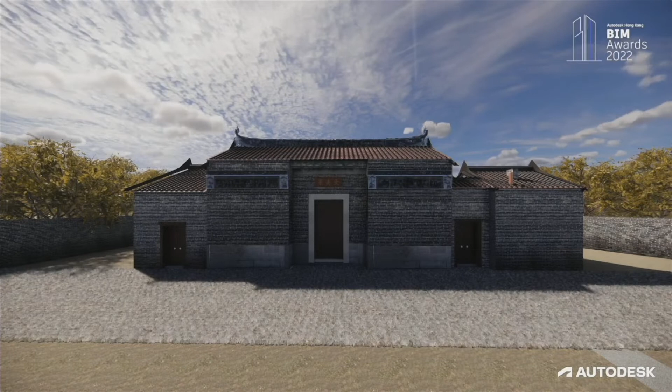Tai Fu Tai Mansion is the first government-owned Chinese-style monument testifying the use of Heritage Building Information Modeling (HBIM) on heritage conservation in Hong Kong. It is one of the pilot projects for building up the as-built BIM inventory for the Architectural Services Department. This monument is a 2-story grey brick mansion with delicate design and rich embellishment, built around 1865.

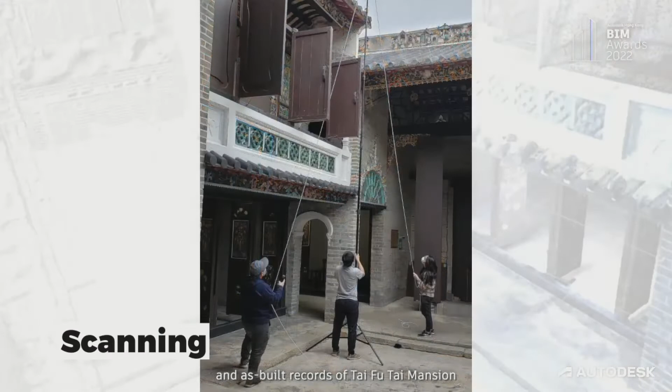There are quite a lot of challenging BIM applications in this project. First, we do not have much design information and as-built record of Tai Fu Tai Mansion, which is quite common for old buildings, so we conducted extensive historical research and interviews with academics, officers of the Antiquities and Monuments Office, local villagers, and retrieved our own records to find out the chronological development of the site. Next, we had to identify and assess the architectural merit, historical interest, and variety of the elements, and conduct 3D scanning on-field to collect existing condition data such as building structure, dimensions, and images in order to build up the HBIM models.

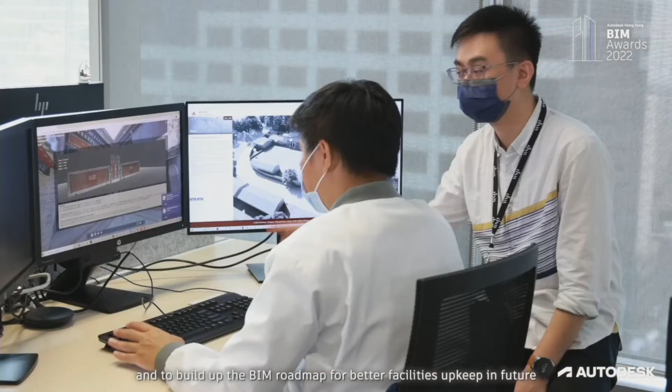Common data environment Autodesk BIM 360 is used in this project by the following parties on different BIM uses. First, maintenance surveyors of ArchSD, as one of the maintenance agents of government-owned buildings, are responsible to coordinate with all team members and build up the BIM roadmap for better facilities upkeep in future. Second, heritage conservation consultants, Revival, carried out historical research study on the background of Tai Fu Tai Mansion, determining the character-defining elements and their level of significance. Third, BIM consultant WSP developed the HBIM model for animations, virtual tour, and heritage archival records by incorporating character-defining element schedules and photographic records of each element into the model.

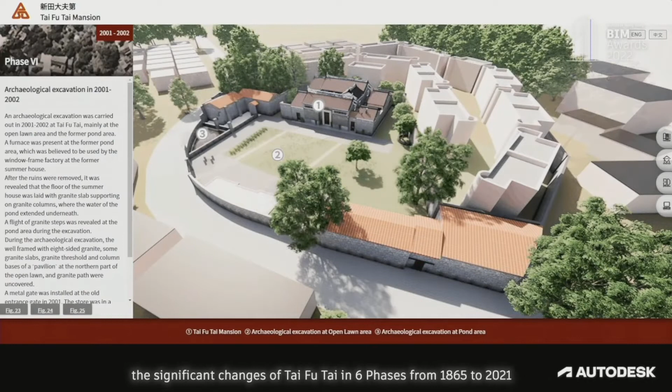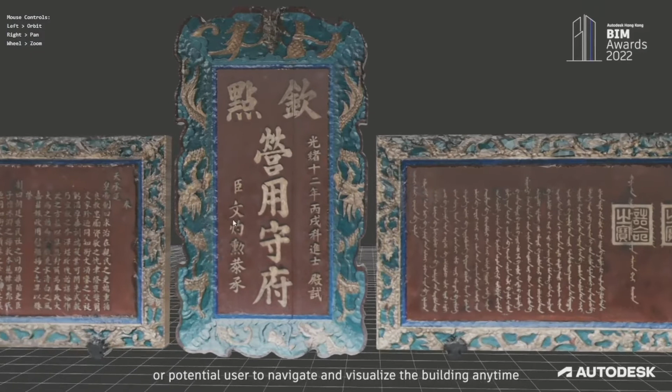To showcase these changes, a timeline storyboard was developed with illustrative images recording the significant changes of Tai Fu Tai Mansion in 6 phases from 1865 to 2021. A virtual tour is also produced by adoption of game engine technology and seamless 360-degree spherical panoramic images. Key plans, information text with historical information, and interactive 3D objects are provided to enable the project team or potential users to navigate and visualize the building anytime, even if the site is closed or far away from town.

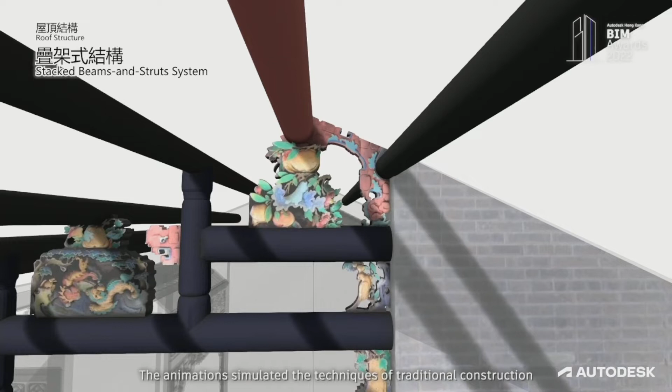Last but not least is the production of 4D animations. The animations simulated the techniques of traditional construction to enable maintenance personnel to visualize the construction sequence, for example the laying of the Chinese-style pitched roof structure, decorative plaster molding, and bricklaying. This is particularly useful as training material for appreciation of historic buildings.

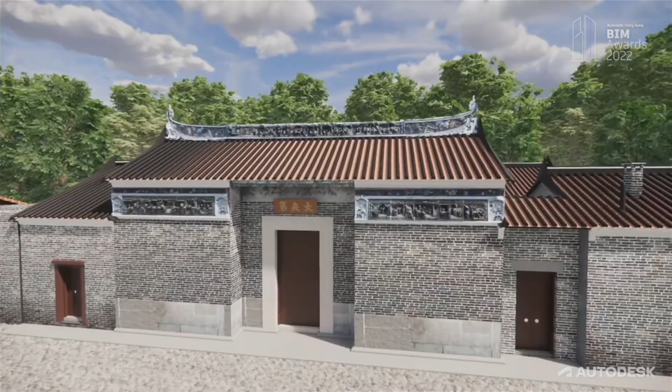Wow, what an impressive project indeed. So now we'd like to invite Ms. Chong and Wendy to be on stage to present the trophies for us. Meanwhile, please allow me to invite the representatives of Architectural Services Department, Hong Kong SAR, to be on stage and receive the award.

Congratulations! Perfect. Okay, let's take a photo together.

Congratulations, and we would like to invite the representative to deliver the acceptance speech for us.

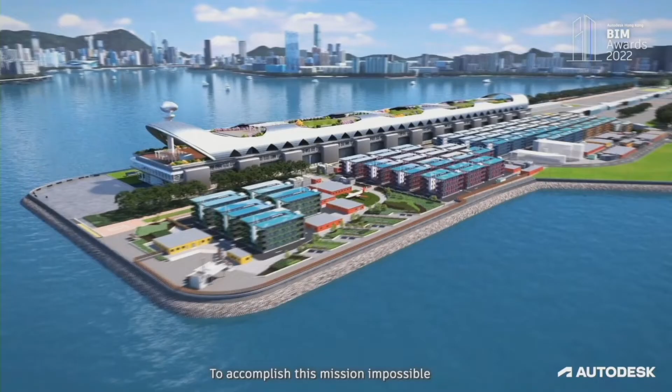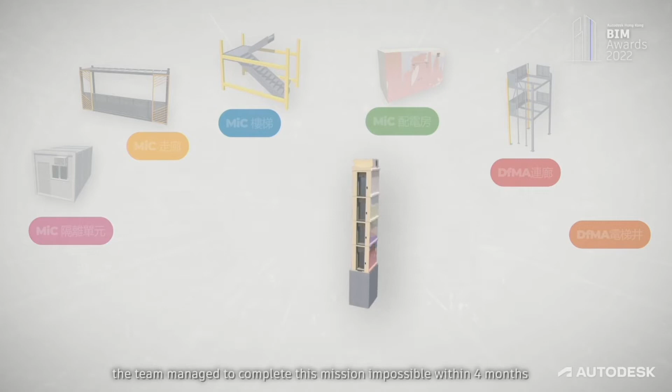To accomplish this mission impossible, the team utilized building information modeling and related innovative technologies throughout the whole project lifecycle. Based on the DFMA design method, the team broke the prefabrication record for a single permanent building in Hong Kong by using MIC rooms and stairs, DFMA corridors, and the first mixed structure DFMA lift shaft in Hong Kong. With the help of innovative technology, the team managed to complete this mission impossible within 4 months and deliver the project in best quality as well.

This project is very similar to the Hong Kong Infection Control Center in Lantau back in 2020 — same background, same building nature, and also the same challenges. Again, the most challenging part of BIM application is time. We have an even tighter schedule and higher MIC adoption rate. Luckily, we have the same project team, and everyone is already familiar with BIM application.

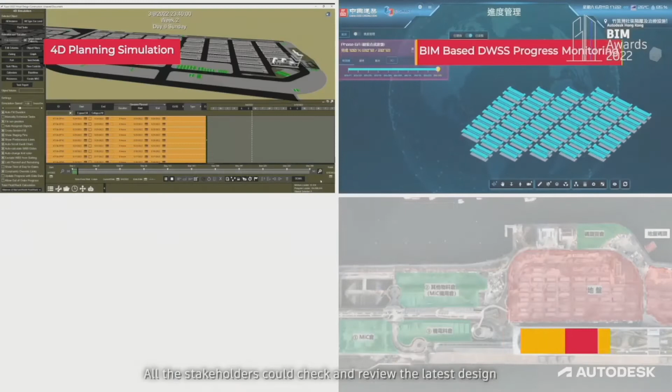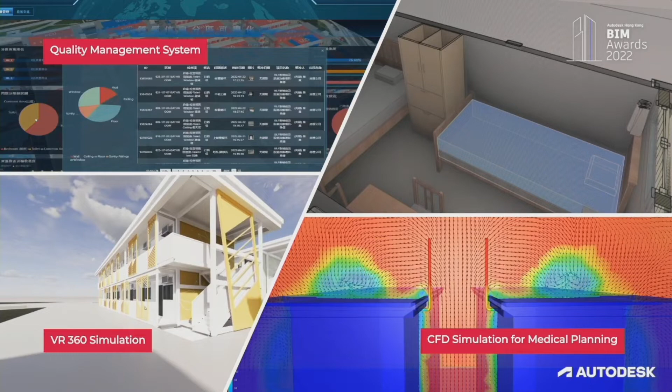We use BIM-generated animation to train the new staff. All the stakeholders could check and review the latest design through the online cloud platform in real time. The key to successful BIM implementation is ISO 19650. We set up a proper information flow, common data environment, and clear roles and responsibilities, so all the BIM uses are done properly.

We use Autodesk BIM 360 together with the C-Smart platform created by CSHK as the CDE. The team members create, coordinate, review, comment, and revise the design BIM model on the CDE, along with the information contained at each project stage. One thing that could be improved about CDE application in our next project is incorporating the facility management requirements and information management system into the CDE, which would save more coordination time in the FM stage. CFD simulation was carried out for airflow patterns in the roof area during the medical planning stage.

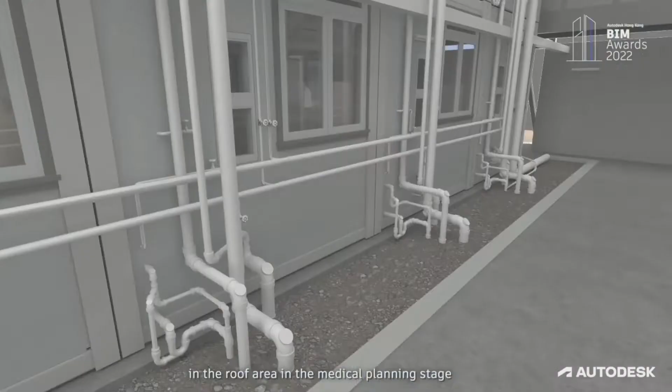According to the results under extreme conditions, such as wind speed of 220 km per hour, the height of the windpipe was raised to more than 3 meters, so that the polluted air can be directly discharged into the high-velocity area, complying with infection control standards and requirements of the World Health Organization and Hong Kong local standards.

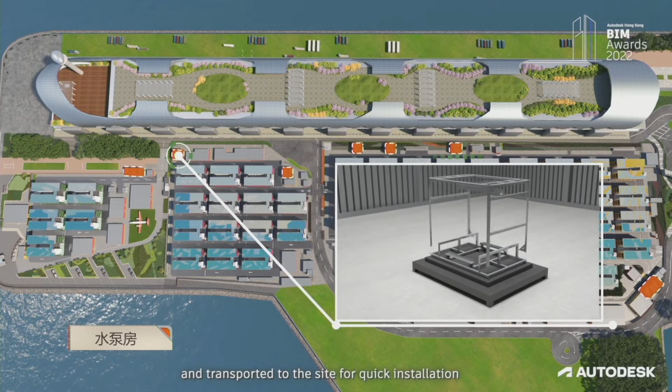In addition to the modular building, the team used the DFMA method to design the supporting facilities as well. For instance, the DFMA water pump is assembled at the factory and transported to the site for quick installation. All pumps are equipped with a LoRaWAN wireless signal transmission system. By this IoT technology, the transmission distance can be up to 10 kilometers and the operation of pumps can be monitored at the central control room in real time.

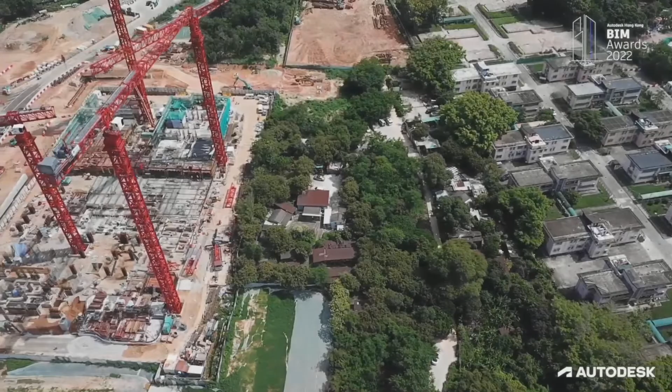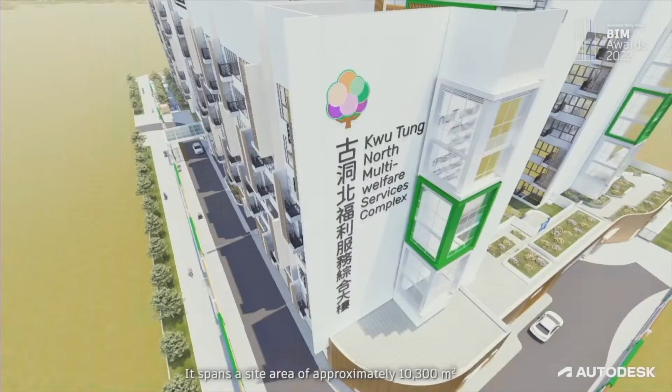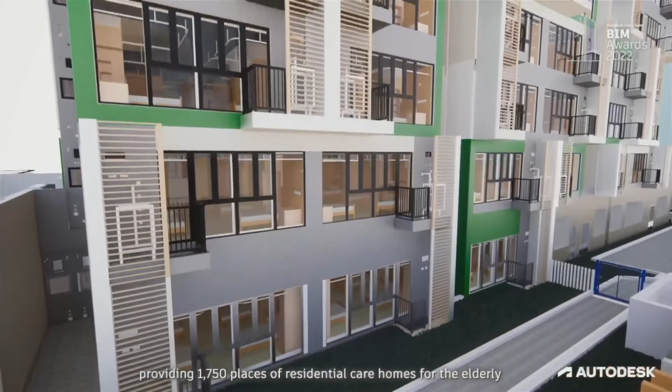The multi-welfare service complex is located at Area 29 of Kwu Tung North New Development Area. It spans a site area of approximately 10,300 square meters and a total gross floor area of approximately 44,000 square meters. Managed by ArchSD, the project was commissioned to Shui On Joint Venture for the design and construction of the complex in December 2019. The project consisted of two buildings providing 1,750 places of residential care homes for the elderly, care and attention homes for the disabled, and a day activity center cum hostel for the mentally disabled. The multi-welfare service complex will provide accommodation for the eligible elderly residents currently living in the Dills Corner Garden in the vicinity.

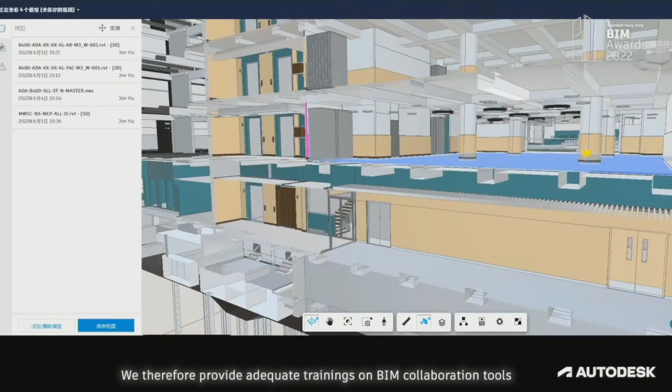At the start of the project, the team faced some challenges through BIM application. We tried to encourage different project stakeholders to get involved in BIM collaboration throughout the design and construction process. However, not all related parties possessed the same level of BIM maturity. We therefore provided adequate training on BIM collaboration tools.

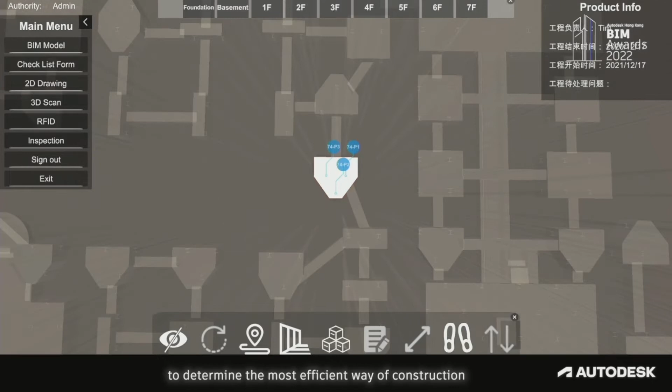On the other hand, modular integrated construction technology is fully applied in this project. During the construction stage, a total of 1,764 MIC modules were planned to be installed. Therefore, having a streamlined site process of the MIC cycle is the most critical issue to be resolved. To tackle this, we took advantage of 4D animations supported by lab-based work to determine the most efficient way of construction, covering logistics, work sequence, and safety provision.

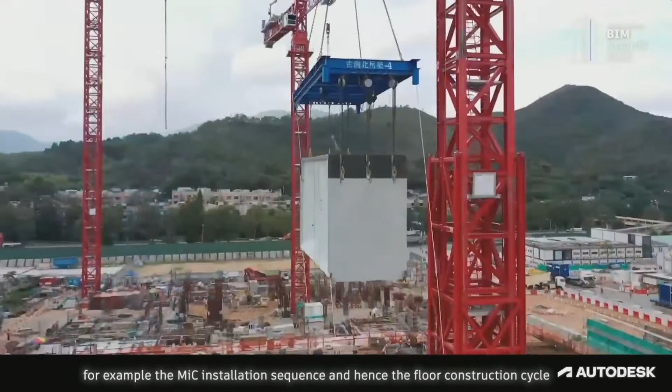It is inevitable to have thousands of clashes in the development of the design. The number of clashes found by Navisworks and CDE which were resolved during the design stage is the KPI for design quality and avoidance of abortive work. The project team has verified the sequence of construction activities by BIM 4D modeling before execution on site, for example, the MIC installation sequence and hence the floor construction cycle. To this end, the floor cycle was successfully achieved.

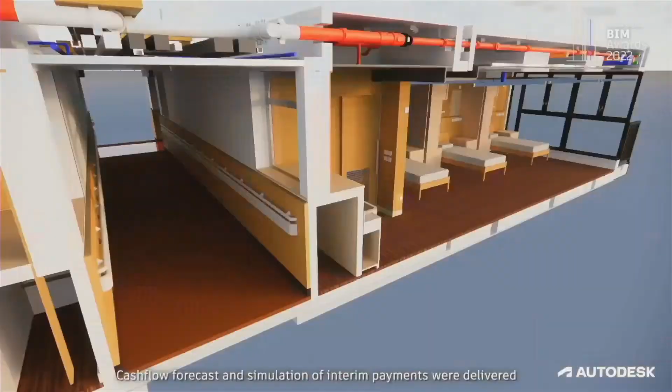Moreover, the BIM 5D modeling demonstrated the successful integration of the BIM 3D model with master program and cost data. Cash flow forecasts and simulation of interim payments were delivered. Collaboration with quantity surveyors was sought in this regard, which aimed to provide an accurate financial model.

The outbreak of COVID-19 has made a dramatic change to the world of work. Social disruptions such as suspension of face-to-face meetings, work from home arrangements, etc. Setting up of CDE and introduction of open BIM collaboration tools have enabled a better coordination workflow over the new normal. To echo Construction 2.0, we must transform to smart construction through the adoption of innovative technologies.

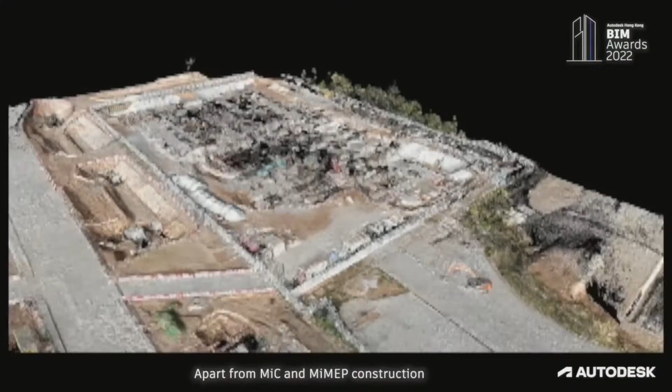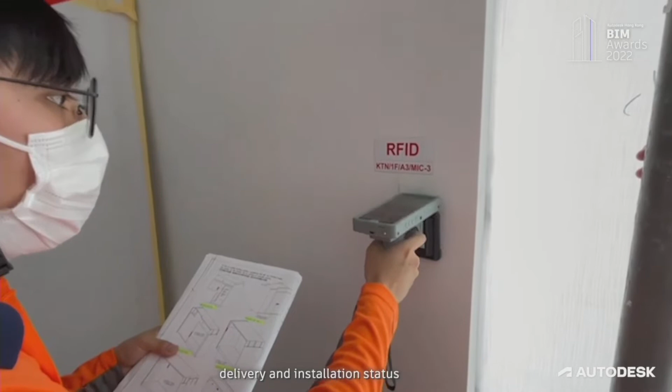Apart from MIC and MiMEP construction, digital twin platforms with the aid of drones, point cloud scanners, and virtual reality to enhance safety, etc. It could also be passed to facility management together with the as-built BIM model. Integration of BIM and our RFID system was done by means of Autodesk Forge to provide a real-time graphic output of MIC production, delivery, and installation status.

Good things come in pairs. This project is also winning the Autodesk AEC Excellence Award 2022 for Best Building Design Project Award, with over 500 submissions from 47 countries. We couldn't be prouder.

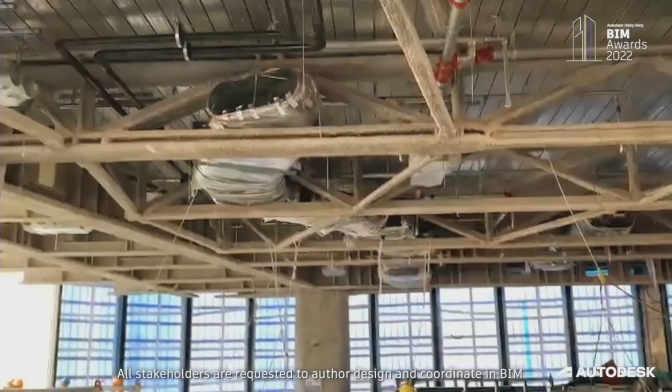Given the complexity of the design, RLP has led the project team to overcome a number of challenges. The project team of this world-class project involves over 25 key stakeholders who come from different countries including mainland China, the UK, Germany and Czech. All stakeholders are requested to author, design and coordinate in BIM, and the team has to overcome cultural differences and technical software incompatibility.

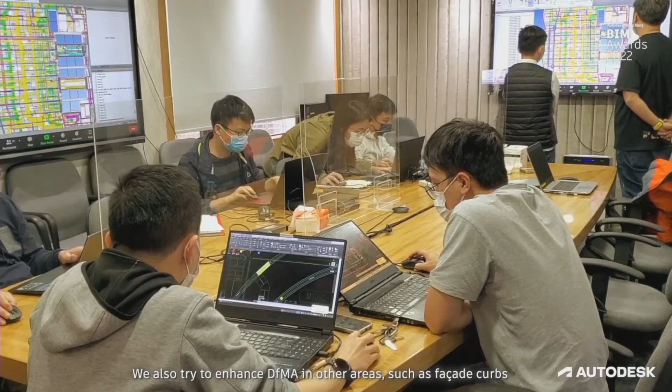This iconic design leads to massive prefabrication of steelworks and curtain wall panels of high level of precision. The facade elements have curvilinear geometries which we cannot afford to correct any design errors on site. Because of this, it is necessary to have full planning for DFMA. Being a main contractor, Hip Hing keeps close bonding with our clients and consultants, and leads our subcontractors to fully adopt BIM in daily coordination. We also try to enhance DFMA in other areas such as facade curbs. It helps frontline workers to enjoy higher flexibility of facade installation and eliminates 30% of time from handling remedial works.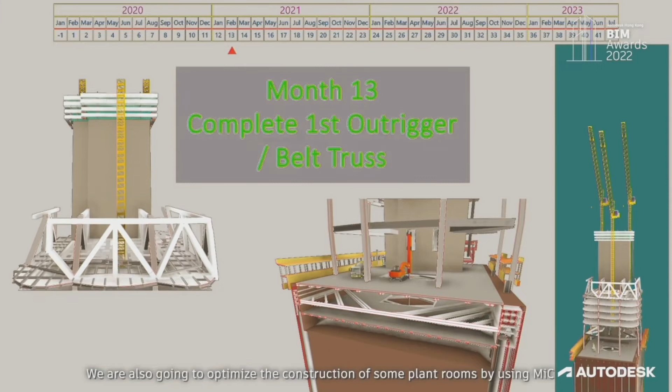We are also going to optimize the construction of some plant rooms by using MIC. Compared to traditional cast-in-place construction, the new approach is supposed to save 16% of time in critical path. These key performance indicators demonstrate that after collective contributions, all parties can eventually share the bonus gained from BIM.

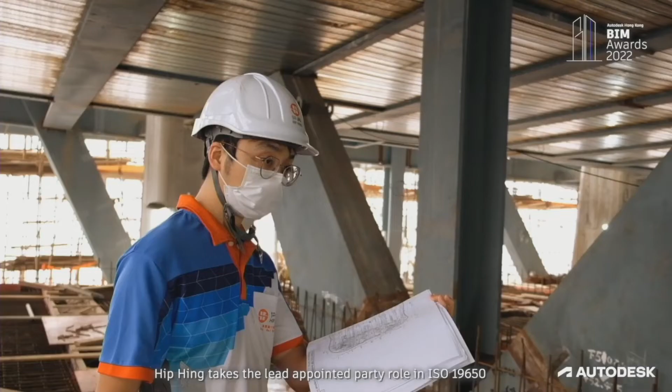In the construction stage, Hip Hing takes the lead appointed party role in ISO 19650. We set up a standardized folder directory in the cloud to collect, manage, and disseminate the information for all project team members. Through creating this single source of information, it facilitates the teams using up-to-date information at any moment. However, for these complex projects with detailed geometry, we also need a powerful platform to fetch the information from the CDE. And like other projects, we also come across internet constraints.

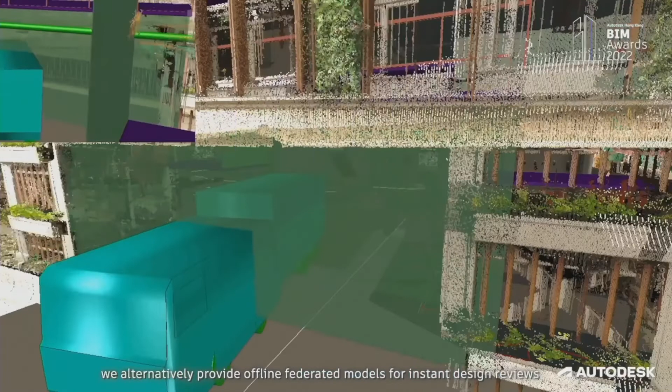Therefore, we alternatively provide offline federated models for instant design reviews. Autodesk Navisworks offers the best solution in this situation because it is compatible with open BIM model formats, and it also supports third-party collaboration tools so that we can channel the issues into our CDE.

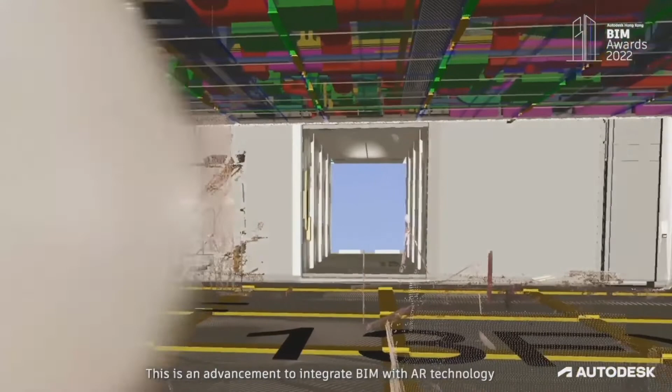We always educate our staff to build up an automation mindset. For instance, we have compiled different programs through the Dynamo plugin. We replace tedious and repetitive works. We even encourage our staff workers to use their mobile device to overlay the design model with site background. This is an advancement to integrate BIM with AR technology. It also helps to create an accurate digital twin towards the operation stage.

To invite again Ms. Xiong and Wendy to be on stage to present the awards for us. Meanwhile, let's invite the representatives of Hip Hing Construction Company Limited and Henderson Land Development Company Limited to be on stage to receive the awards, please. Congratulations.

You may stay a little bit closer as it's a big team.

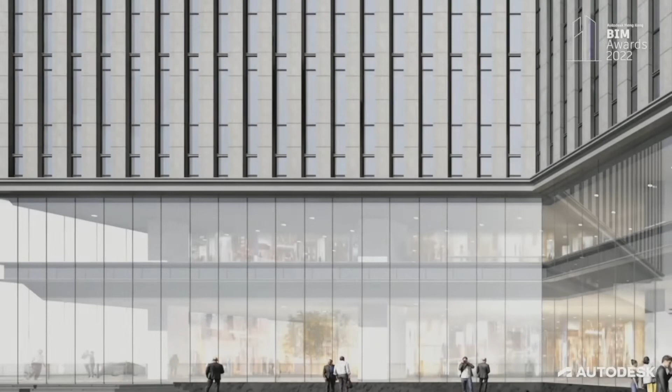The Kai Tak district is becoming a distinguished, vibrant, attractive, and people-oriented community by Victoria Harbour. The proposed commercial development consists of two separate parcels under the same lot. A pair of tower buildings emerged as an iconic gateway overlooking Kai Tak City Centre and City Square at the front, introducing a new experience to the public with aesthetic and spatial quality delivered.

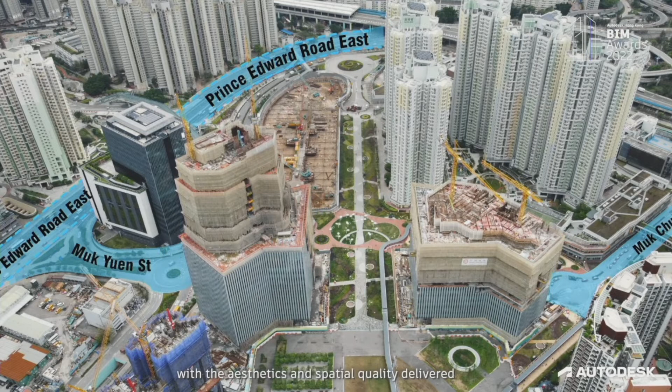Upon completion, the Twin Towers will host a new Sogo department store along with complementary retailing, entertainment, dining, and lifestyle servicing facilities. The retail complex is expected to be in business by the end of 2023 and is set to become a new landmark in East Kowloon.

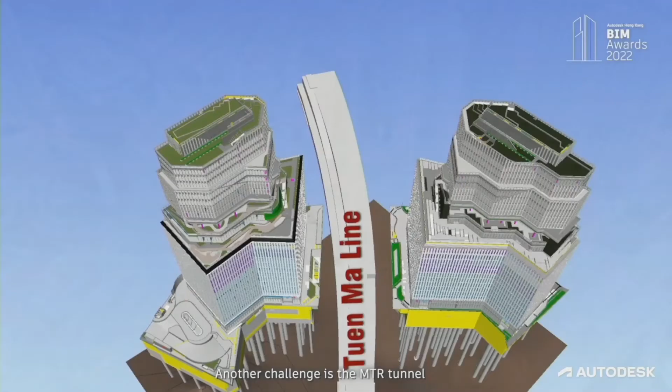This project includes two towers with distinguished layouts, and due to the drainage reserve zone crossing our site, a mega truss system weighted more than 1,000 tons was designed to handle the weight of 9 stories of structure beneath it. Another challenge is the MTR tunnel that runs between the twin towers of our project. To maintain the stability of the structure near the MTR tunnel, the project team decided to maintain all shoring systems during basement construction, even though the change would sacrifice the construction period.

Our project team utilized 3D laser scanning to evaluate the existing condition of ERS and BIM models, which deepened our understanding of existing conditions. Our engineers can acquire more accurate measurement of potential conflicts and optimize construction planning adaptive to site constraints. Such optimization to construction planning extends to the installation of the complex mega truss system. BIM models offer a realistic environment to examine our construction sequence, site utility planning, and safety measures.

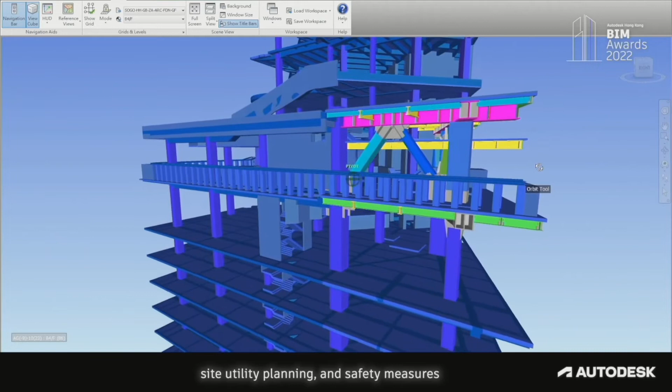MIC and MiMEP are another key innovative feature in this project. The MIC and MiMEP modules are well coordinated in the BIM model before fabrication. More than 1,000 parts of the modules were fabricated in the factory, thus reducing site work and accelerating construction progress. We realized several major achievements during the construction period.

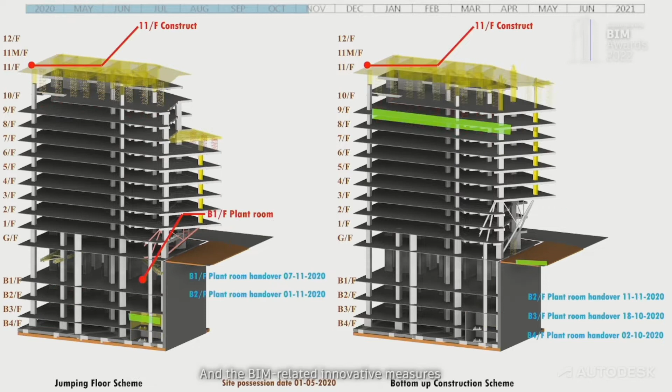More than 1,500 design issues were resolved before construction. The BIM-related innovative measures are set to contribute a 4-month acceleration to the program, saving a significant amount of resources for communication and paperwork. They also mitigated project risk due to site constraints and complex construction activities.

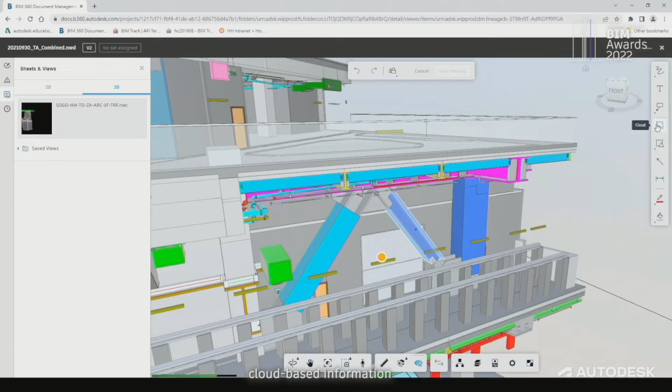The pandemic has brought a significant impact to all industries and has changed our working habits. BIM 360 as the common data environment allows all project stakeholders to access the same secure, cloud-based information, allowing them to collaborate on BIM models, drawings, and documents remotely. The functions of tracing records, status, and versioning help us maintain a single source of truth in a centralized location.

Now we'd like to invite Ms. Chong and Wendy again to be on stage to present the awards for us. And let's invite the representatives of Hip Hing Construction Company Limited, Leader Bright Limited, ATAL Engineering Group, and Vercon Limited to be on stage to receive the award. Congratulations!

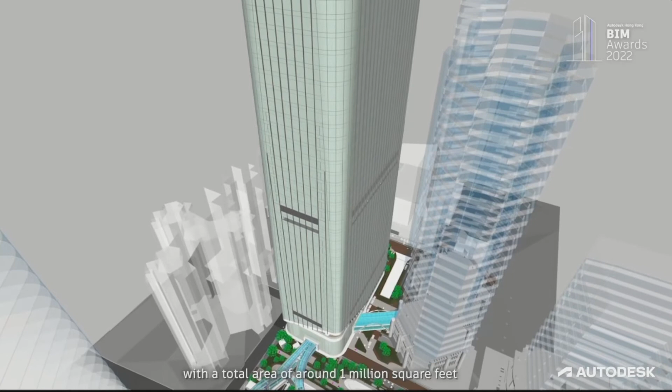Swire Properties Taikoo Place has been developed with the long-term ambition to become one of the world's global business districts. Taikoo Place is the latest addition to the district's redevelopment project. The new tower will feature 42 stories of triple Grade A office space with a total area of around 1 million square feet. It is linked to the other 8 office towers, shops, and facilities, and nearby MTR stations in the district by an architecturally designed elevated walkway.

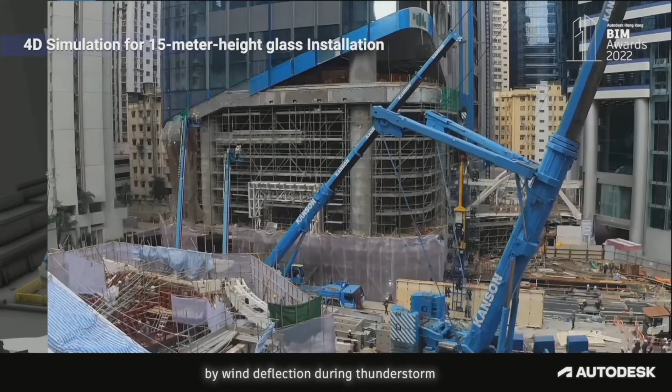One of the major challenges was the use of jumbo glass panels that span up to 15 meters tall and 3 meters wide, pushing engineering limits. The size of the glass panels would have been significantly affected by wind deflection during thunderstorms. Hence, a pre-tension system with tension rods, the first in Asia, was adopted to strengthen and guide the glass module without exposing any supporting frame or glass fins behind.

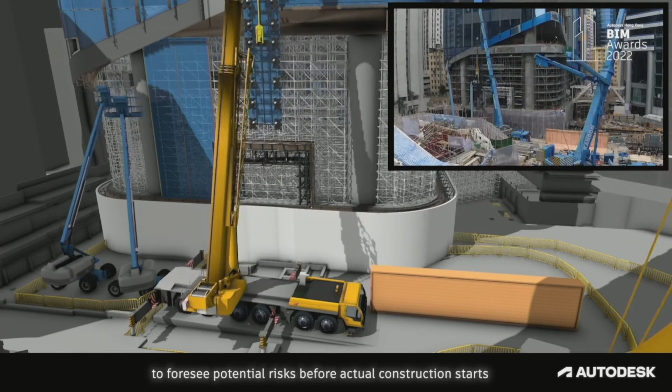Virtual design construction helped the project team conduct 4D construction sequence and method simulation for planning installation arrangements. The workflow of jumbo glass wall installation was visualized for the project team to review easily and closely the proposed procedure, to foresee potential risks before actual construction started. BIM provides a digital environment with high accuracy conditions to optimize design and shorten construction period, including complex ELS demonstrations, steelwork connection joint optimization, and digital models for fabrication.

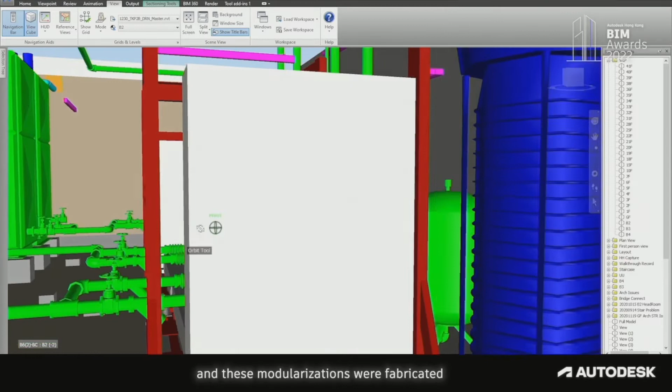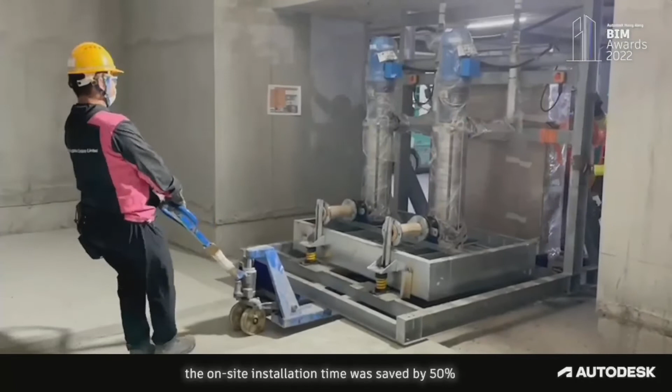MIMEP is one of the digital fabrication methods adopted in various building services systems, and these modularizations were fabricated before delivery to the construction site area. The aim was to reduce installation time on site and material wastage. Fabrication modules were designed and coordinated in BIM before fabrication commenced in the factory, particularly for the cooling tower plant modular set and booster pump set. On-site installation time was saved by 50% compared to the conventional approach.

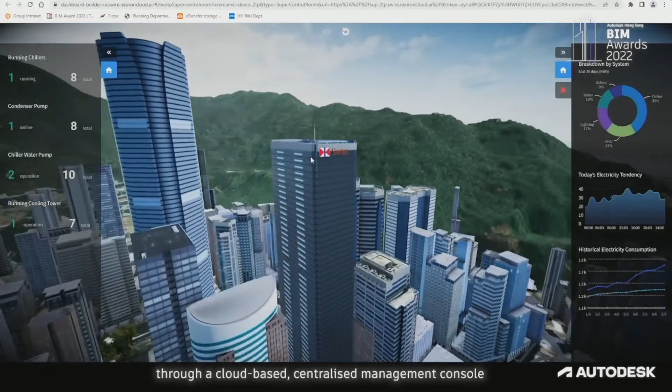Two innovative items were adopted in the two Taikoo Place projects. The first is a digital cloud and AI building management system that uses 5G and Internet of Things to gather real-time sensor data from equipment and systems. It integrates our as-built information model to display complex datasets through a cloud-based, centralized management console. It also helps automate the building system and optimize the resources of facility management. The adoption of this digital cloud AI platform has benefited the future asset management of this project.

The second innovative item was the use of mixed reality to provide a combination of real-world and digital twins, allowing stakeholders to review the virtual copy of what they were planning to create. The facility management team will benefit from identifying asset equipment locations through the platform for asset maintenance in the future.

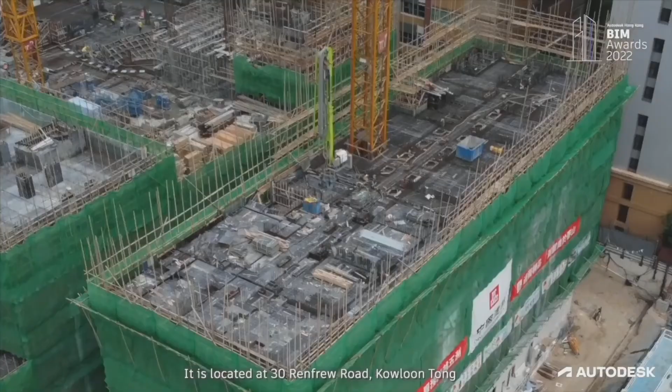The scope of works includes construction of a 4-block hostel and academic building complex with 1 story of basement, interior fitting out, exterior elevation, escalators, lifts, building services and underground utilities, and also a link bridge connecting to an existing building.

The 4 blocks are of different heights, including one with 17 stories, 2 with 15 stories, and the rest with 13 stories. The upper part of the building complex is hostel, providing over 1,700 accommodation places for wardens, tutors, hostel manager, and staff.

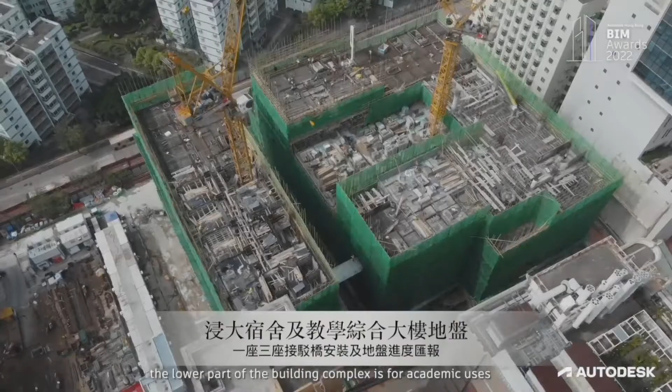The lower part of the building complex is for academic uses, with a floor area of 6,900 square meters, and facilities including a large soundtrack recording studio and a multi-purpose room with special functions.

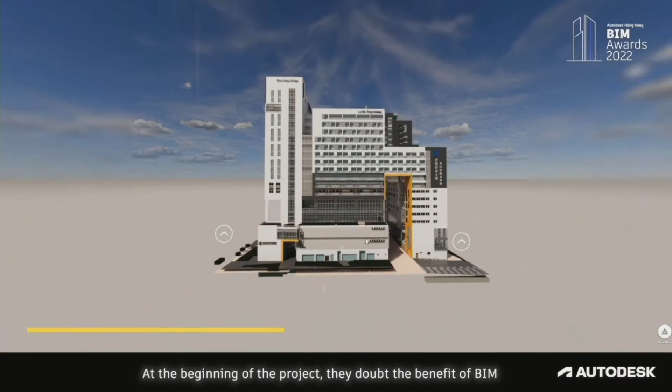The biggest challenge of BIM in this project is the lack of BIM awareness among engineers. At the beginning of the project, they doubted the benefit of BIM and thought that BIM was just a matter for the BIM team. So we adopted two strategies.

First is the policy, second is the technology. Our company established the '全民皆BIM' policy, and all staff were given proper BIM training.

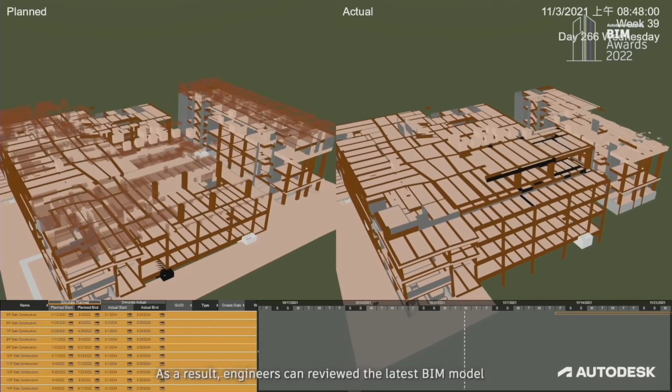Secondly, we made use of the BIM 360 platform to lower the barrier for project team members to view BIM models so they could use it. As a result, engineers can review the latest BIM model and become familiar with the non-typical structures.

Quantity surveyors can make use of the BIM model for quantity takeoff to speed up the payment process to subcontractors. Through clash detection and resolution, potential conflicts among different trades can be detected before installation. Building service engineers of each trade use BIM to review spatial information and resolve issues.

To fulfill the low noise criteria level for special function rooms in this project, an extra layer of sound insulation was added to the BIM model for detailed coordination of building surfaces.

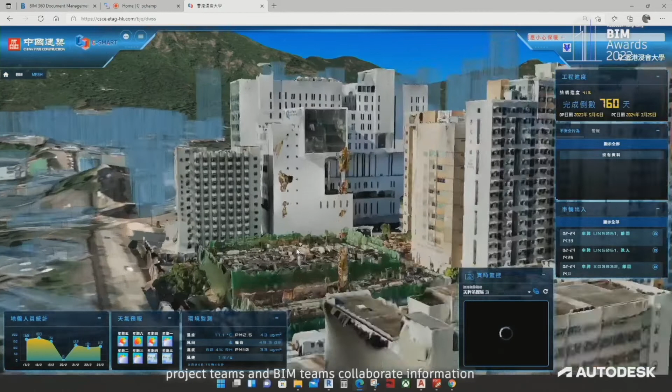Autodesk Construction Cloud and the Sigma platform, developed by CSHK, are the common data environments we used in the project. The appointing party, lead appointed parties, project teams and BIM teams collaborate on information, with information containers complying with ISO 19650. We also adopt CDE for the next project to keep track of the most up-to-date and real-time collaborated information.

Scene2 Cloud Platform is used as a site QA/QC tool in this project. BIM models in IFC format and point cloud scan models can be uploaded to Scene2 Cloud Platform. Scan and BIM models are available to visually compare in order to detect issues in the QC/QA process.

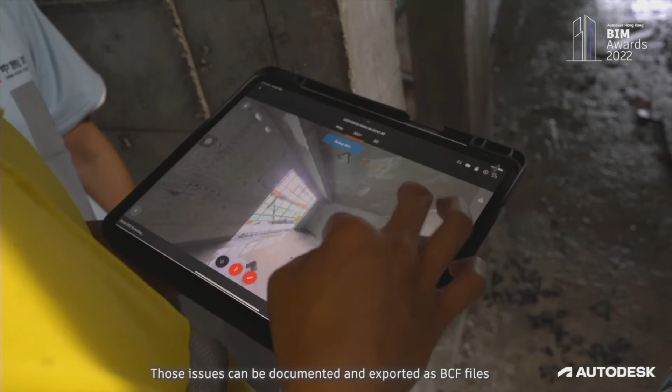Those issues can be documented and exported as BCF files for visual coordination and project review. The same comparison tools can also be used to compare two sets of scans and monitor progress. Engineers can be invited to review and verify the model to monitor the works.

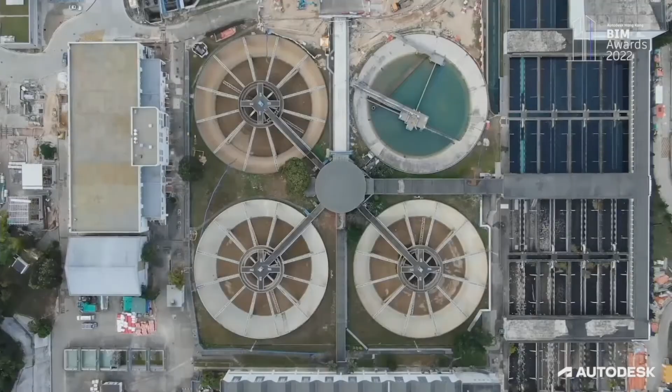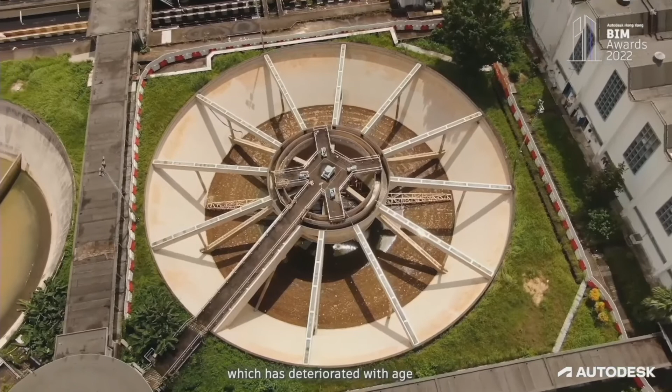The projects comprise the in-situ reprovisioning of Shatin water treatment works, South Works, which have deteriorated with age and become uneconomical to maintain its operation, with its reliable output reduced significantly after over 50 years of service. Since its commissioning in 1964, apart from replacing the aged treatment facility, the reprovisioning work will also upgrade the treatment capacity of the South Works by over 50%, from 360,000 cubic meters to 550,000 cubic meters per day to meet the increased water demand arising from future developments.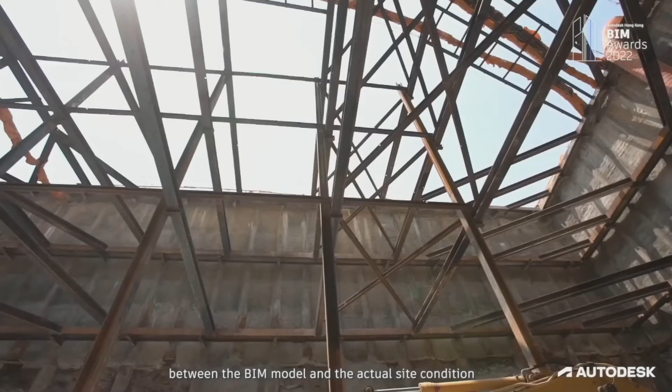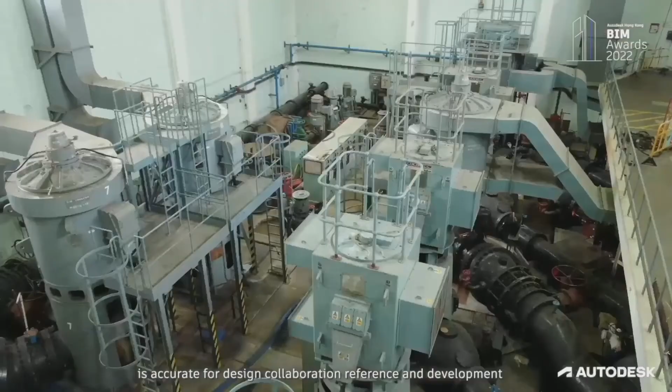The project is constructing new water treatment facilities integrating with existing elements. During design stage, we found some discrepancy for the existing elements between the BIM model and the actual site condition. It was because the existing BIM model was initially built using information from as-built drawings that were hand-sketched over 30 years ago. To solve this problem, the contractor arranged site verification by laser scanning and created a 3D point cloud model of the existing condition, in order to ensure the BIM model of the existing condition is accurate for design collaboration, reference, and development.

The BIM execution plan outlines the BIM use, the BIM deliverables, information delivery strategy, model federation strategy, level of information need, CDE collaboration, etc. The performance of BIM is also measured by the progress of implementing BIM use staged in the BIM execution plan. The BIM team together with the engineering team will review the status of each BIM use regularly to evaluate the progress of implementation.

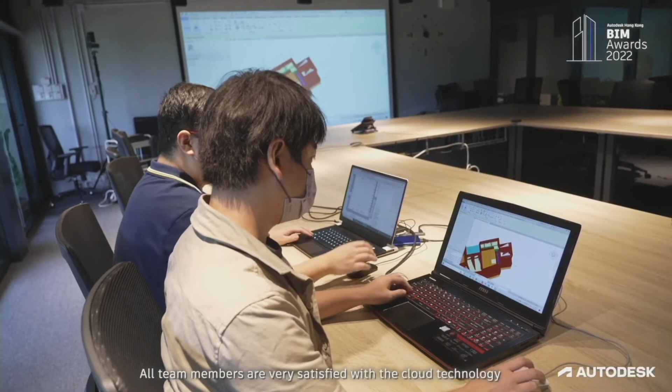CDE is engaged daily for exchanging of ideas, presentation, and coordination for design development. All team members are very satisfied with the cloud technology for its flexibility and accessibility.

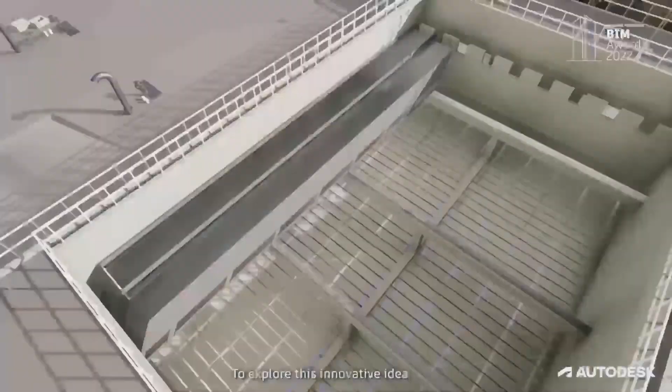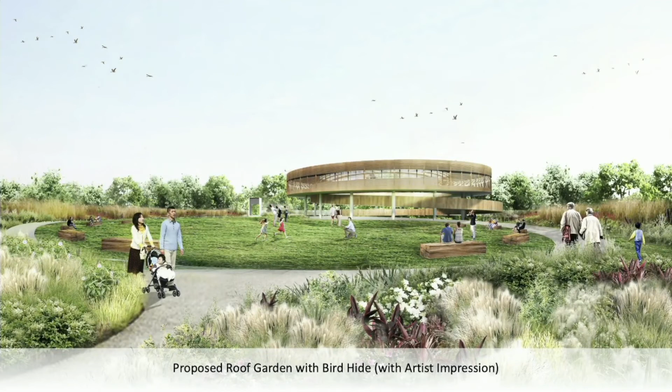The next honorable mention awarded project is from Drainage Services Department, Hong Kong SAR Government, AECOM Asia Company Limited, and Paul Y CREC Joint Venture. Their winning project is Yuen Long Effluent Polishing Plant, main works for Stage 1. Now let's invite the representatives of Drainage Services Department, Hong Kong SAR Government, AECOM Asia Company Limited, and Paul Y CREC Joint Venture to be on stage and receive the awards. Congratulations!

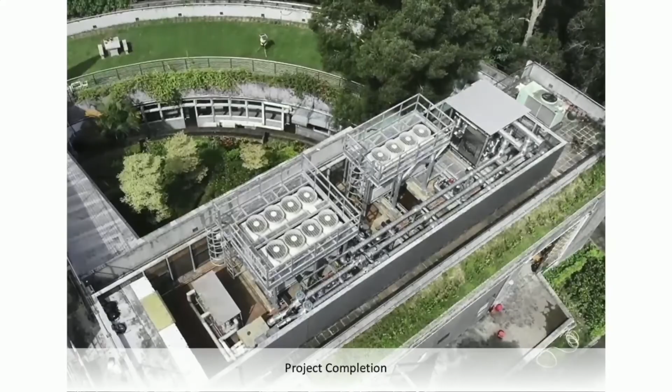A few more photos from the cell phones. Keep smiling. One more cell phone.

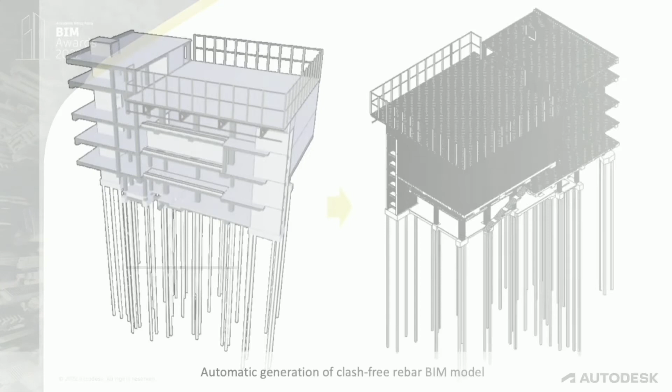Last but not least, the Outstanding Student Award comes to Li Ming Kai, Liu Yuhan, Wong Chun Lok, and Lau Wen Lam from the Hong Kong University of Science and Technology, for the project Open BIM-based design optimization and prefabrication automation of steel reinforcement. Congratulations!